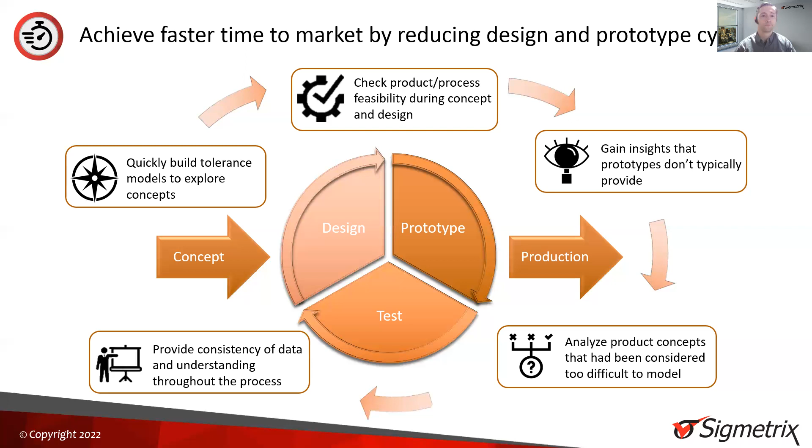For over 20 years, Sigmetrix has focused on ease of use, allowing more users to perform tolerance analysis quickly. This democratization of tools and information can be powerful, but it will provide no value to an organization if it can't be readily adopted and provide meaningful and accurate results that allow users and management to confidently make actionable decisions.

So there are 2 common approaches found in companies for dealing with mechanical variation. A stack-up analysis is performed by an engineer or designer, most often in Excel, but sometimes by hand on paper. Some companies have templates or guidelines that engineers can plug nominal values from CAD models and tolerances from standards or legacy drawings into.

If the tolerance stack shows the limits of the specification will be violated, the engineer or designer will typically tighten tolerances on the parts that can be changed, or those costing the company the most money, and then move on. Companies that take time to do detailed analyses across their designs admit it just takes too much time, and in many cases lacks the accuracy of modeling real-world behavior necessary to avoid problems when production starts.

On the other hand, the designer could make things look good in CAD, a design that's nominally perfect and looks great in design reviews, but ignores the analysis required to understand how real-world imperfect parts will behave. If they must dimension and tolerance prints, they might reference legacy drawings or similar products and copy the dimensioning scheme and tolerance values. This creates a false sense of security that no problems will occur once production starts.

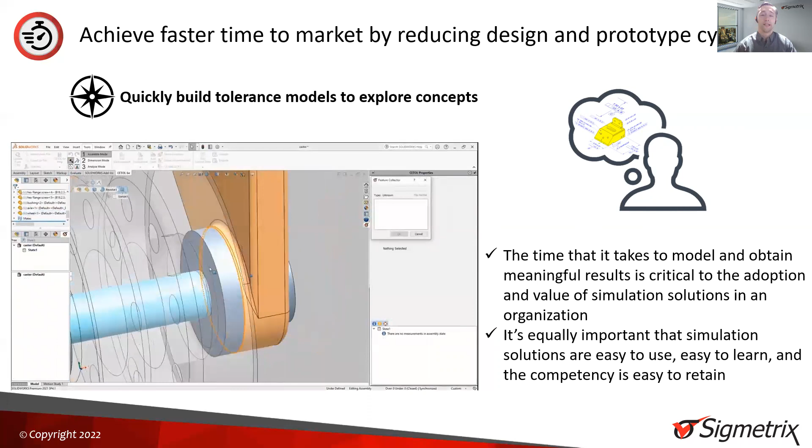While this certainly doesn't seem like a successful approach, it's quite common. Over half of the companies we speak with admit they do some analysis, but most often on things deemed most critical, but they don't do enough. In either of these cases, design is thrown over the wall and manufacturing or inspection must guess on the intended function of the product or deal with the unanticipated variation while trying to bring it to production.

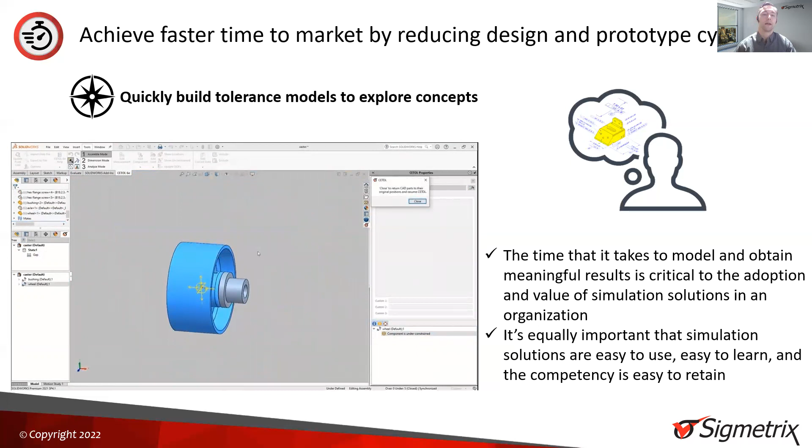The result? Over 70% of the companies engaging with Sigmetrix are seeking solutions to reduce manufacturing problems caused by tolerance issues. A third admit to wanting to reduce problems that arise after product ships to the customers. Both approaches are inefficient and lead to costly loopbacks in the design process.

Sigmetrix provides simulation tools and education that enables design teams to build tolerance models that more accurately predict or simulate real-world behaviors in equal or less time than it takes to populate a stack-up sheet. This allows designers and engineers who are being asked to take on this new responsibility gain insight that help them design better products in a shorter amount of time.

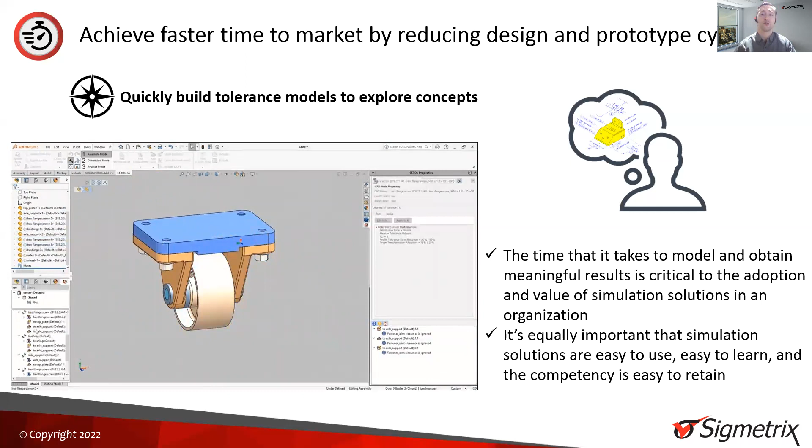Although many companies recognize the usefulness of GD&T to better manage variation, it can still be difficult. The task of building tolerance stacks has traditionally been performed during the validation stage or later in product development process. Many companies continue to work this way today. This is partly driven by dependency that traditional stackups have on completed drawings. Those drawings feed into spreadsheets, and there is less opportunity to have tolerance analysis influence dimensioning schemes and, more importantly, design decisions.

High-performing companies are taking a new approach and considering variations as early as concept and R&D stages. This new approach only needs very crude concept CAD models with surfaces and construction geometry that represents critical to function interfaces and critical to function features. This is like what some might call a skeleton model.

Our simulation tools use simplified representations to create the variation models early in the development process, prior to final geometry being defined. Because these models require little effort and can be built quickly, engineers or designers can build and compare many design concepts. Infeasible or costly concepts can quickly be eliminated, allowing the product team to focus on development concepts that are more likely to succeed. These models will remain associative to the CAD geometry and are updated throughout the development process.

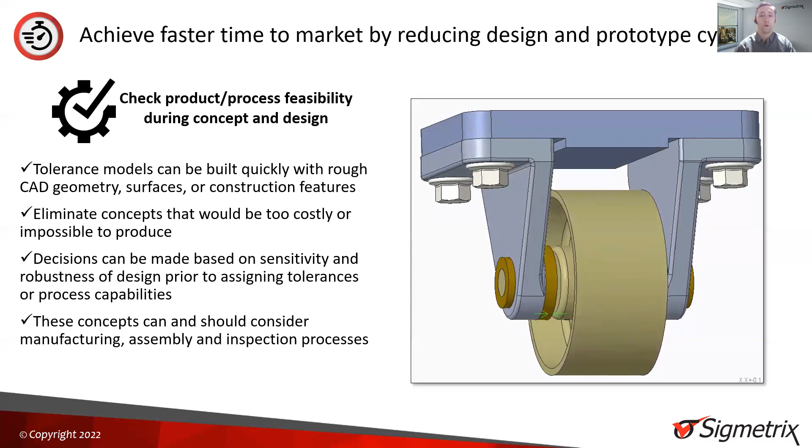The models also provide the engineers and designers with valuable insights into the robustness of the design and the ability to answer questions they have about the design without being burdened by the often complex mathematics required to calculate the answer. These insights also help users make decisions about manufacturing, assembly, and inspection processes well before the CAD geometry has been finalized.

Prototype, pilot, and test builds can provide valuable information during the development of a new product. However, physical prototypes can be costly and have significant limitations. These physical builds aren't able to provide a statistically significant sample size that represents the production volume of the final product. They don't typically represent realistic process capabilities of production manufacturing and assembly processes because better tools and more skilled operators are used. In other words, they typically represent the best assembly possible and not what's likely to be created during a final production.

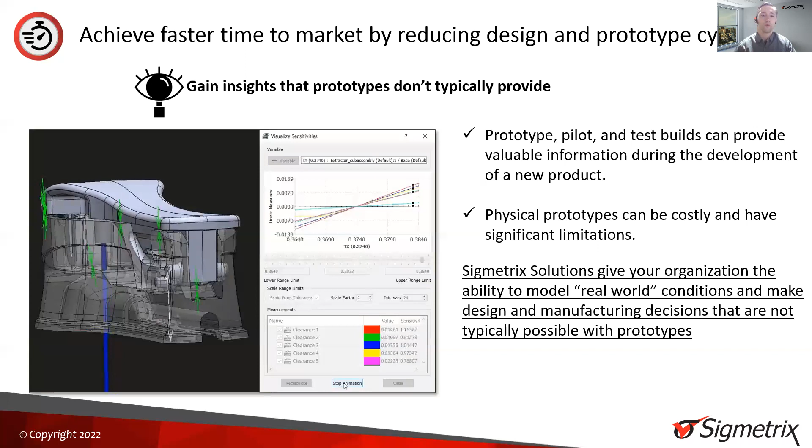They also don't typically allow your team to look inside the product to determine the root cause of failure for critical to function requirements. Like other computer-aided engineering tools, Sigmetrix solutions are built on a robust mathematical model that can be used to simulate the impact of variation without the need of physically building a prototype. The video here shows insights gained from modeling the product in CETOL 6 Sigma. This tool gives your organization the ability to simulate real-world conditions and make design and manufacturing decisions that are not typically possible with traditional prototypes.

When going through design and prototype phase, wild and crazy concepts get through all of the time. It's not always possible to take these designs, though, all the way to the prototype and analysis phase due to the cost and time requirements. But what if it were a lot simpler to get the kind of feasible data you needed quickly?

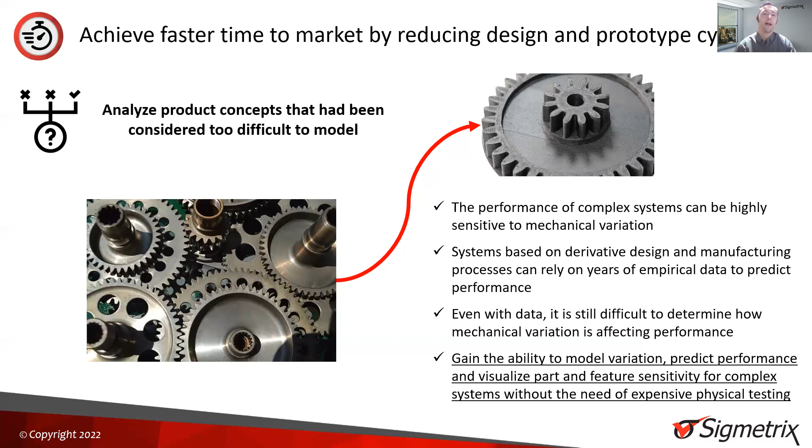This legacy data is no longer relevant, though, when using new manufacturing processes or when the design is significantly changed. In many cases, the engineers are only making educated guesses and have no insight into the root causes that impact these specifications. Some of the performance specifications that have been addressed on gear systems with Sigmetrix solutions include backlash, chatter, tooth wear, and system efficiency. Without Sigmetrix solutions, a company would need to build prototypes and test rigs to collect this data, and even then, they may not have the full understanding of how variation is impacting the system.

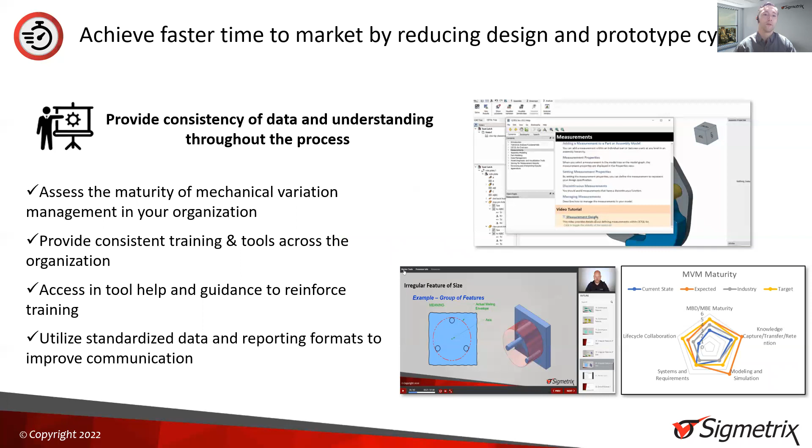Product lifecycle efficiencies are not limited to the concept and prototype phases. Promoting a consistent understanding of vocabulary for sharing variation related data and concepts can also help speed up the overall process. In an ideal organization, design, manufacturing, and quality departments all speak the same language and work together during the product development process. There's less room for miscommunication that leads to misunderstanding and costly mistakes. The training solutions provided by Sigmetrix help ensure that everyone in the organization can share a common understanding of what's needed and why during the product lifecycle.

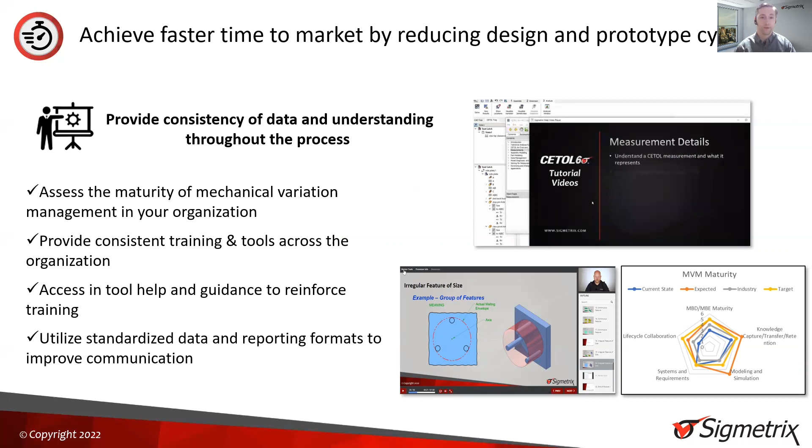So throughout the discussion, I've mentioned our solutions a few times. Over the years, we've expanded these products and service solution offerings. We have our flagship product, CETOL 6 Sigma for 3D tolerance analysis. CETOL works with all the major CAD platforms across multiple industry verticals. And if you started annotating your 3D models with GD&T, CETOL can import that MBD data, shortening that measurement setup.

EasyTOL is our 1D tolerance analysis software, taking people out of spreadsheets at an entry level. EasyTOL was introduced about 4 years ago and works with most CAD platforms as well. And our standalone version specific to SolidWorks, CATIA, and NX added the capability early last year to pull in that model-based definition data as well.

Our services include extensive mechanical variation management consulting projects and training. The training offered is both on our products as well as skills independent of the software, such as fundamentals for ASME and ISO standards, advanced GD&T, tolerance analysis fundamentals, model-based definition, model-based enterprise, and many more topics. Additionally, we support a variety of delivery methods: traditional on-site instructor-led training, virtual instructor-led training, and the big piece that's been hitting home for our user base is our new self-paced method offered through our computer-based curriculum.